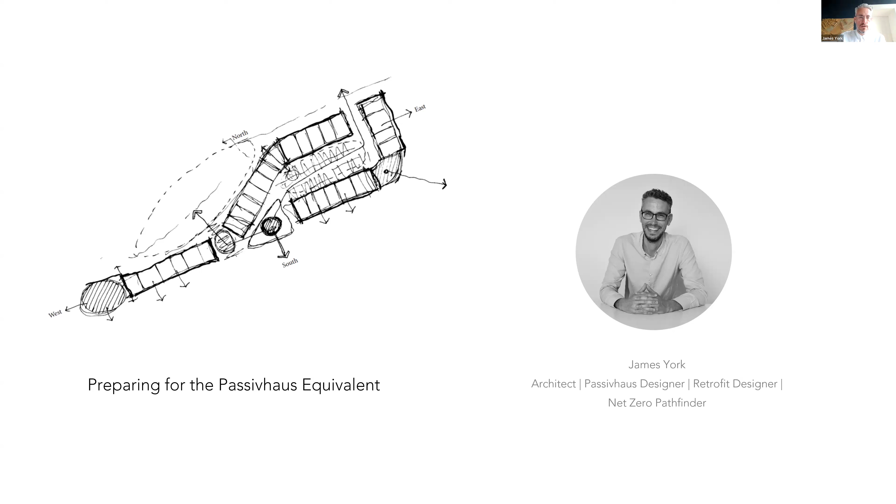Hello everybody. Really looking forward to today's discussion and presentation. I'm James York, an architect, Passivhaus designer, retrofit designer, and net zero pathfinder working at Collective Architecture. Today I'm going to be talking to you about our pathway for preparing for the Passivhaus equivalent and our thoughts on the current process and what lies ahead.

A little bit about Collective Architecture before I get stuck into this. Collective Architecture is a 100% employee-owned architecture practice with a strong track record of design and delivery of social housing, working with housing associations and social landlords across the UK to deliver homes that are socially and environmentally sustainable. Our work puts people at the heart of architecture. The practice is founded on the principles of promoting participation and sustainability in architecture. We've got 54 staff in our 3 practices in Glasgow, Edinburgh, and Dundee, delivering consultancy services across the UK.

From Portsmouth to Peterhead. In 2020, we established Collective Energy, a consultancy service that develops and promotes the implementation of low energy, sustainable and regenerative design within the practice and the wider industry. To enable this, we've been working with the Passivhaus and EnerPHit standards for over a decade, using the principles to inform our design decisions to better reduce energy demand, improve resident comfort and well-being, and mitigate fuel poverty.

So why Passivhaus? The Passivhaus Standard is first and foremost a comfort standard, putting people at the center of design. We believe that the Passivhaus approach helps to deliver homes that are safe and healthy environments to live in, comfortable and affordable to heat, and helps to promote the well-being of those who live in them, enabling them to live their best lives. We see the Passivhaus methodology as a hugely beneficial tool for new builds and retrofit properties in addressing the yawning fuel poverty gap that has worsened since these stats were recorded in 2022.

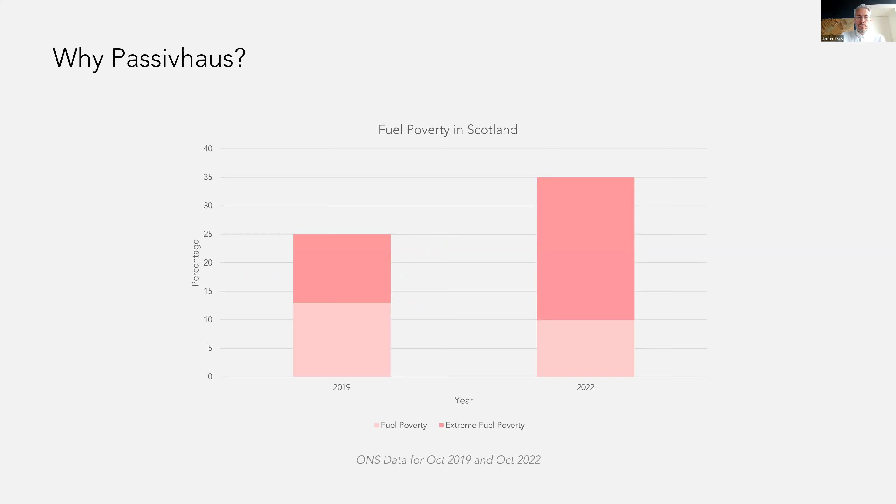The Passivhaus methodology is a proven approach to reducing the performance gap that has been shown to be between 60 and sometimes upwards of 400% in new build dwellings, and that's not even getting into retrofit. We'd never accept that gap if we were buying a new car, and I've always wondered, why does the industry tolerate it for people's homes? Designing using the Passivhaus planning package to meet clearly defined criteria helps to ensure that as-designed performance is met at completion.

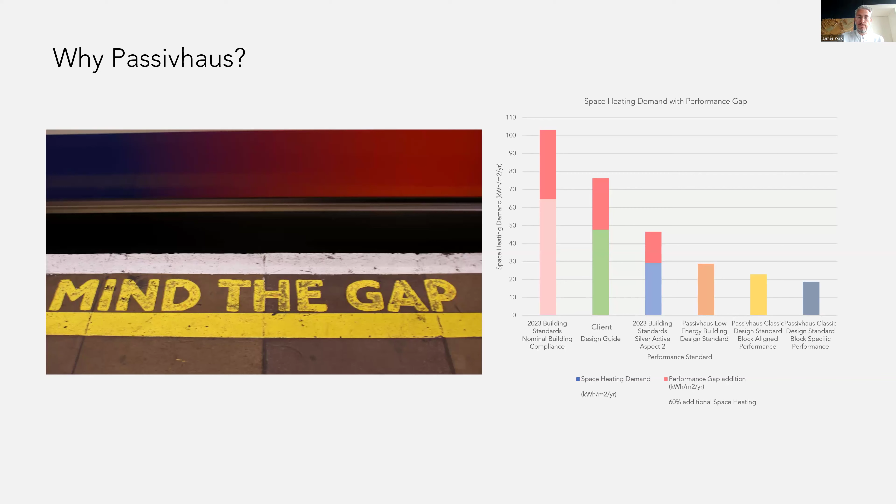SAP is a useful compliance tool. However, the focus on percentage reductions in emissions does not give as clear a picture as clearly defined metrics and targets.

This is one of the key reasons why we advocate for the use of the Passivhaus approach in delivering energy efficiency. The Passivhaus Standard sets out clear criteria for performance. These targets allow flexibility of design, provided the criteria are met.

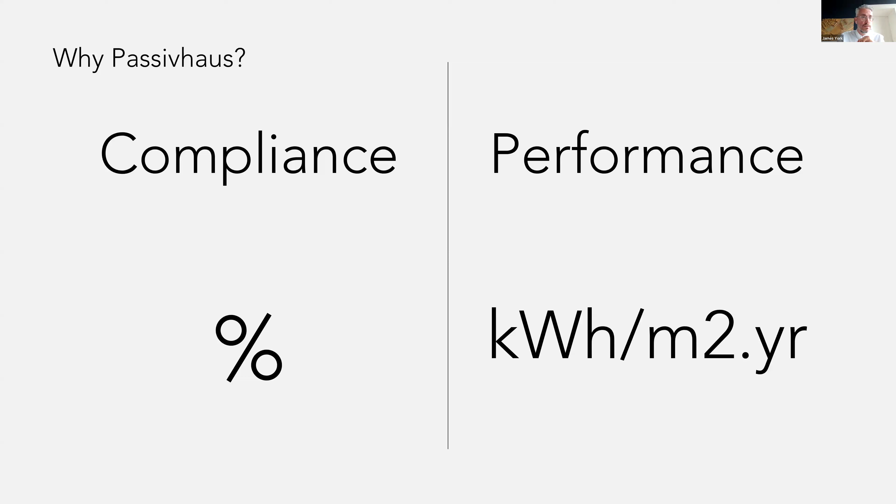The Passivhaus approach has enormous benefits to tenants, owners, and building managers, from reduced energy demand, carbon emissions, and running costs, to prolonged life cycle of components and services, to improved indoor environmental quality and healthier living and working environments.

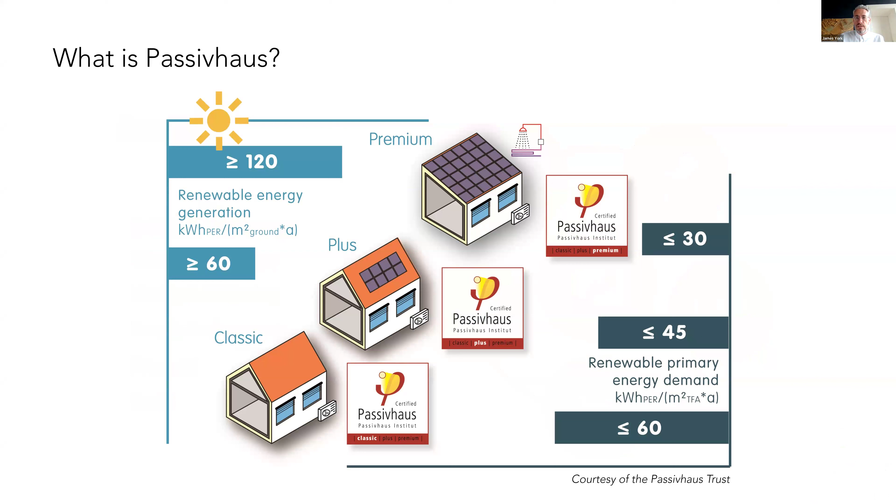What defines a Passivhaus project, and what might we seek to adopt for a Passivhaus equivalent? The Passivhaus Standard sets out 3 tiers of compliance: Classic, Plus, and Premium, with escalating levels of on-site generation. The Passivhaus Low Energy Building Standard sits beneath these for buildings that find it harder to achieve compliance.

Setting clear performance targets serves to significantly reduce energy demand whilst optimizing comfort and mitigating fuel poverty, while driving down emissions to meet our carbon budget.

Passivhaus is an oven-ready standard that has a 30-year track record of meeting targets in the delivery of affordable homes. This makes it an ideal standard to layer into the Scottish equivalent.

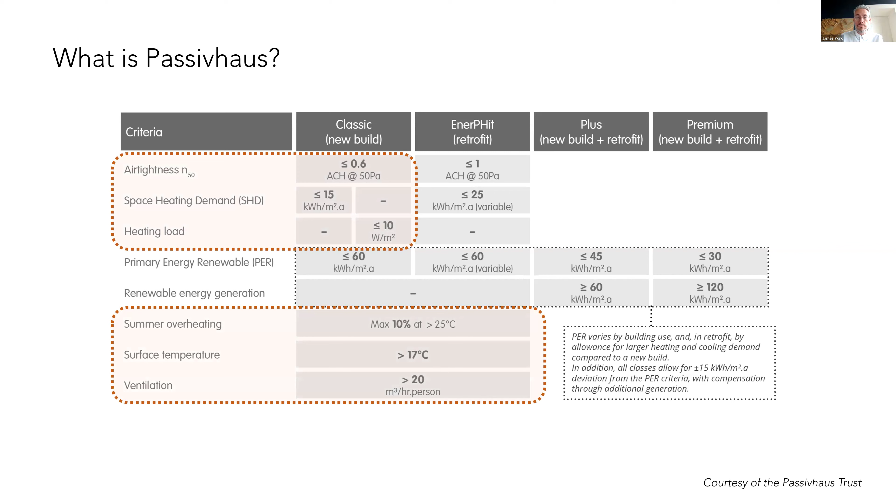So what is Passivhaus in terms of the building? It sets clear targets achieved through a fabric-first approach to reduce energy demand and meet comfort needs, which is absolutely essential. Focusing on these 5 core systems: fabric insulation, triple glazed windows, thermal bridge mitigation, building airtight, and ventilating right with MVHR.

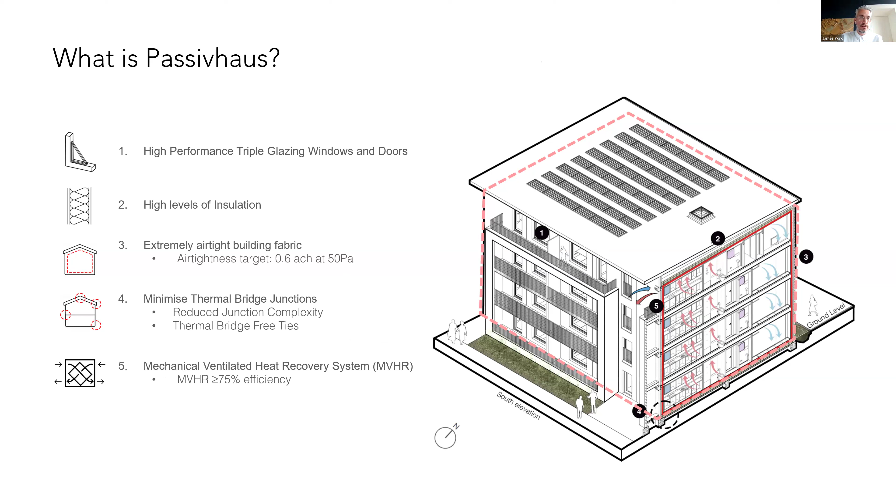The Passivhaus approach is aligned with the RIBA Plan of Work and the key gateways for statutory approval and completion of statutory approval and completion compliance of projects.

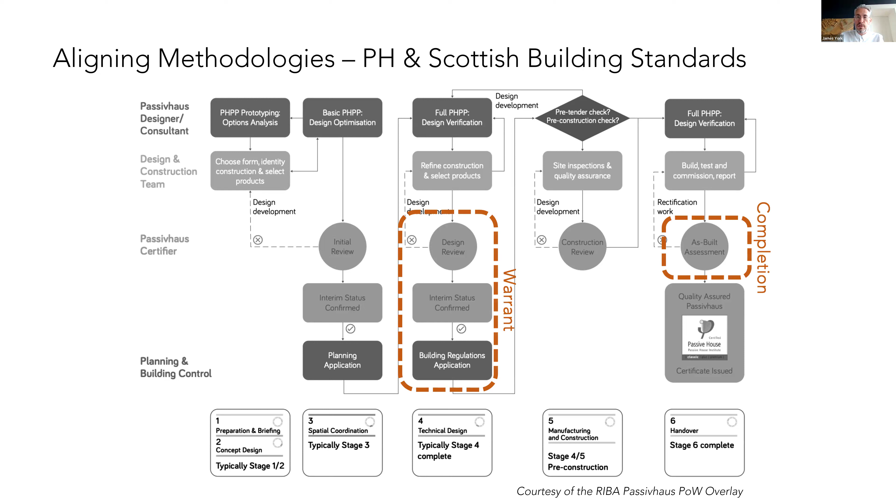What will need to take place is a shift in approach and resourcing of building standard services to review the progress of projects and provide statutory oversight of the strict quality standards necessary for the successful delivery of low energy buildings. The Scottish Government has set out a pathway for delivering legislation up to the end of this year.

They've also recognised that there's a transition period required based on the level of ambition of the legislation itself. At the moment, we're waiting for the summer consultation to happen, and look forward to the process and feeding into that.

So what could a Scottish equivalent to Passivhaus look like? Our view aligns broadly with the Passivhaus Trust view that ultimately the Scottish Passivhaus equivalent should ideally adopt the key criteria for Passivhaus, and that the QA process is mandated.

Projects would be verified by Scottish Building Standards through the existing LABSS or Section 6 assessors. The Passivhaus planning package would be approved as a methodology alongside SAP with the conversion plugin.

What would a Scottish equivalent to Passivhaus look like in terms of the transition period? This would basically mean that industry adoption and upskilling is absolutely critical, and time is needed for that.

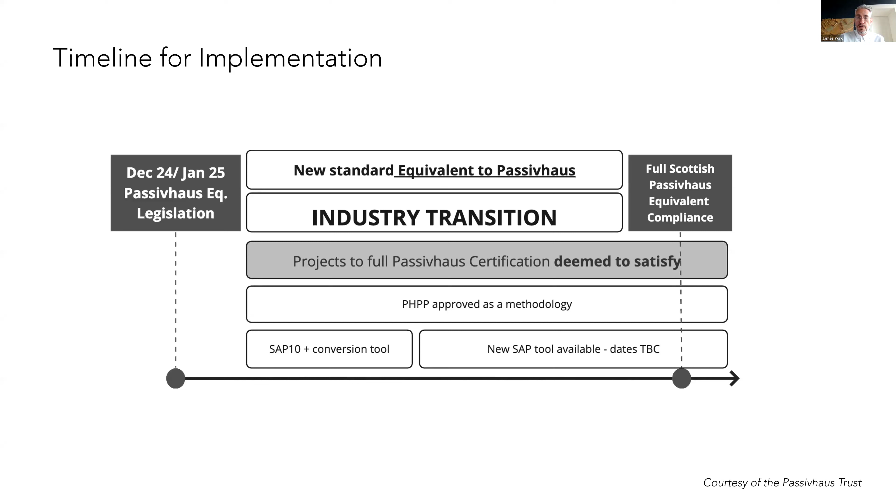So again, in this transition period, the Passivhaus Trust have set up a notional process for how the Scottish equivalent of Passivhaus might become embedded in the industry following legislation being passed in December 2024. The definition of a clear pathway backed up by robust legislation will be critical to provide certainty on the direction of travel so that all parties in the industry can transition with confidence.

Collectively, we're working on a number of projects to the Passivhaus Standard, including the Enerphit Standard, Woodside Towers, 310 flats retrofitted to the Enerphit Standard. We'll talk a little bit about that later. We're currently on site with Polton Street, which is an extra care and intermediate care development, and it will be the UK's first Passivhaus intermediate care building.

And then Powder Hall Nursery and integrated living housing development, which is a Passivhaus Classic project, and we're also Passivhaus consultants on Somerstown regeneration down in Portsmouth, which is a 565 dwelling mixed tenure community and commercial project to the Passivhaus Classic standard.

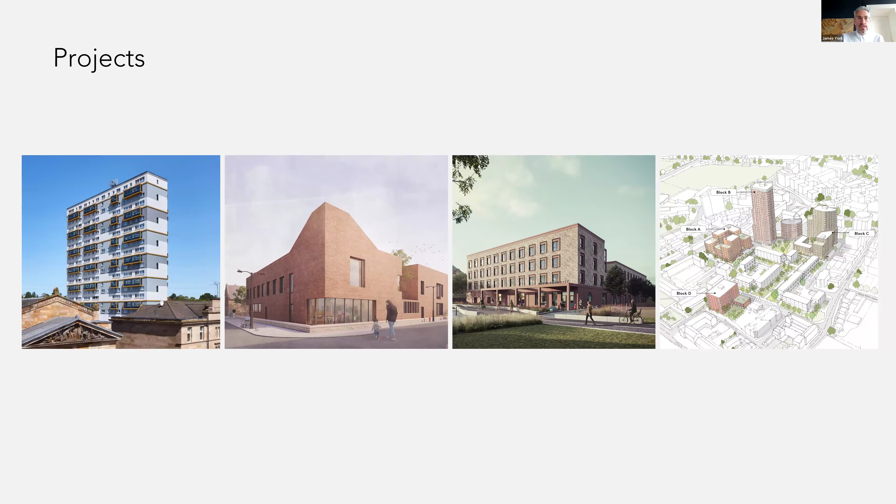Today I wanted to talk about Dundashill, which is a Passivhaus residential project delivered for West of Scotland Housing Association, 90 units of new build social housing, recently handed over in April of this year. The contract value for this project is in the region of 21 million.

One of the key successes of this project was the early definition of the brief at RIBA Stage 2. One of the key elements of that brief was that the buildings would be fossil fuel free, and that the energy cost to heat and provide hot water within the building would be as low as gas. We early on advised the client that in order to do this, delivering the project to the certified Passivhaus Classic standard would be advisable, and they adopted it.

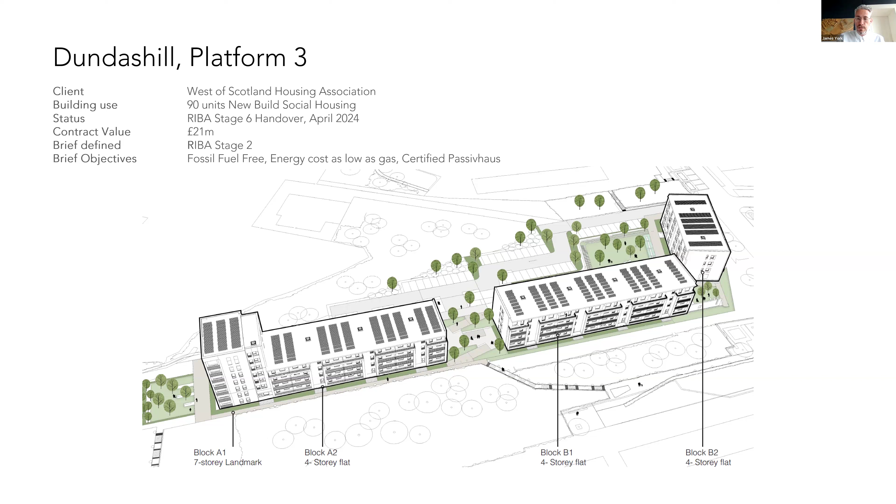In our view, form follows simplicity. With this project, we were able to demonstrate that with great efficacy. Orientation of the project was a really early win. We were able to get most of the properties facing south. A few of the properties are facing east-west, but the bulk of orientation of the properties, which are through flats, are north-south.

We've got, I do apologize for this folks, my PowerPoint is really playing up here, but I shall persevere.

Form factors: simple, robust form with few indents and freestanding balconies. This makes the fabric simple and easy to design, detail, and insulate. Modular construction with panelized offsite manufacturing has helped to speed up and make the delivery cost effective. We've also integrated circularity principles, using the shearing layers principle adopted to facilitate ease of assembly, disassembly, and adaptation.

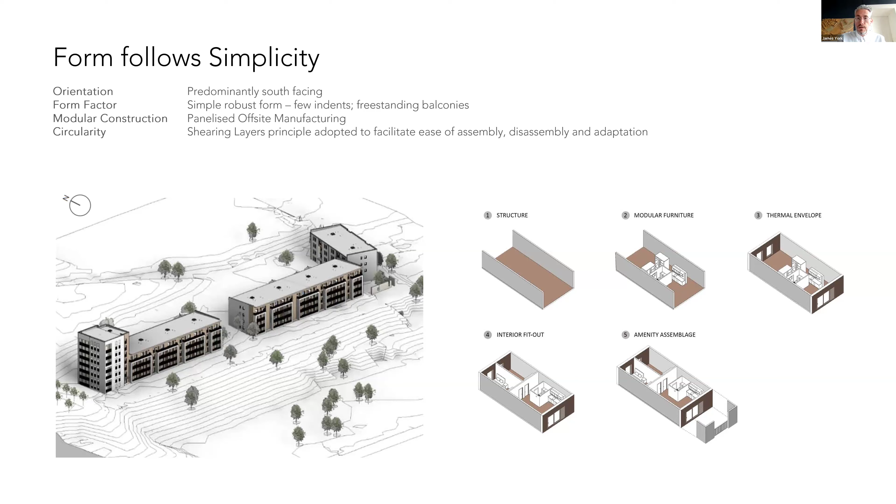We've taken a fabric-first approach with this project, which is broadly aligned with what we'd be looking to deliver in terms of building standards at the moment. Glazing is obviously a bit more enhanced, in that we've used triple glazing with a U value of 0.8, but the performance of the walls, floor, and roof are not a million miles off of what you'd be doing with current building standards.

Air tightness is obviously a far more onerous target, but through the simplicity of the design and careful detailing, we've been able to reduce junction complexity and thermal bridging using thermal bridge-free ties, reducing the impact of thermal bridging on the fabric, allowing us to optimize the fabric and not have unnecessary embodied energy within the overall fabric buildups. Our MVHR system has been designed to be as optimal as possible, reducing duct length runs and achieving an efficiency of 80%.

We've been able to achieve the 15 kilowatt-hour per meter squared space heating demand, but we're meeting compliance with the 10 watts per meter squared heat loads compliance. Alongside the air tightness targets, we've been able to retain the fossil fuel free heating strategy ahead of this being implemented in the current standards in April of this year.

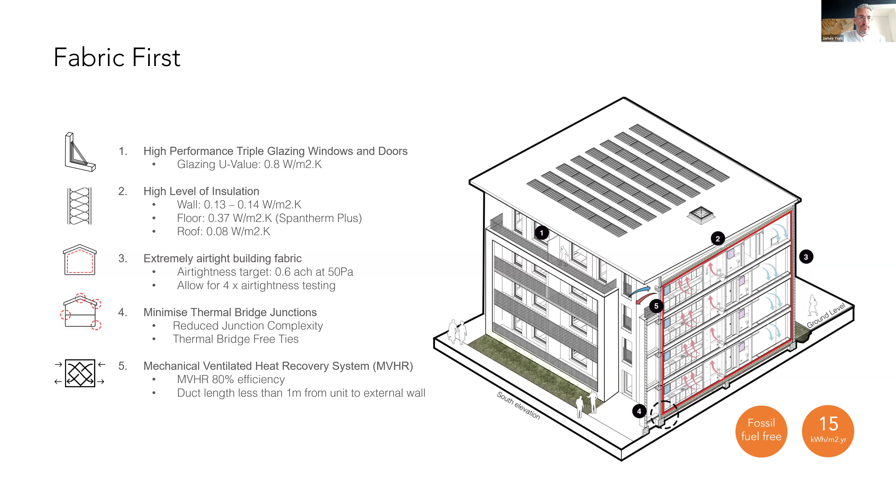Quality management has been absolutely critical through the process. We've been working very closely with the contractor to enable them to get their head around how the buildings can be built to meet the requisite standards, deal with complexities in the design, and ultimately map out a way through the evidencing and quality management process.

Air tightness and thermal continuity drives a lot of the quality standards. This is a good thing. Whilst initially there's a steep learning curve, the delivery becomes more streamlined through careful quality management, supply chain engagement, sequencing, mock-ups, inspections, evidencing and sign-offs, air testing, which we had 4 tests throughout the project, and then ultimately commissioning.

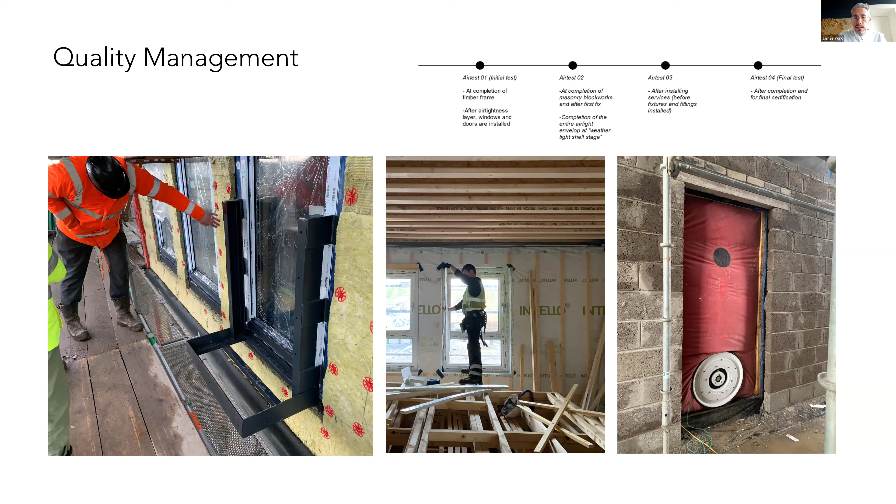Good workmanship is achieved through onboarding and upskilling of trades, through QA management, and a collaborative attitude. Talking about challenges leads to solutions being arrived at collectively. These measures help facilitate smoother running of projects, which benefits contractor, client, and all engaged in the process.

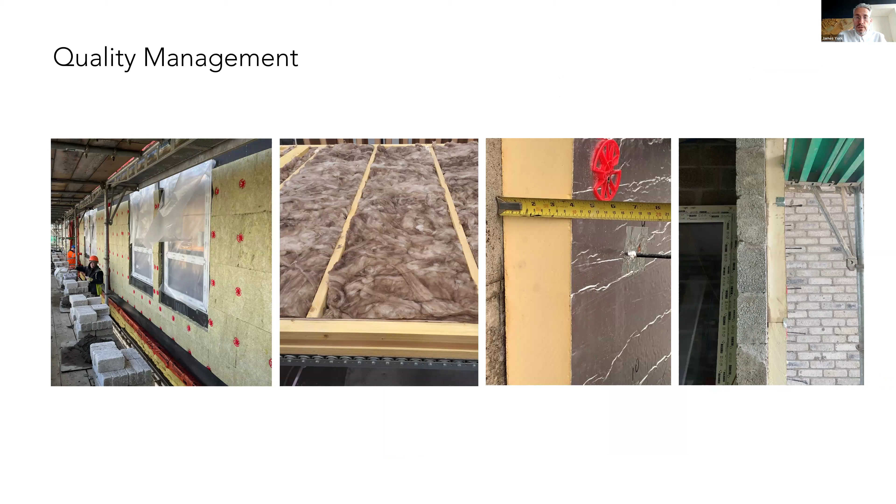In terms of lessons learned from this project, the early commitment made by the client in terms of setting project targets has been crucial to the project being delivered to the Passivhaus Classic standard successfully. Embracing simplicity by simplifying the design and embracing repetition, we could minimize complexities, reduce errors, and enhance overall efficiency without compromising architectural quality.

Early engagement and collaboration. Collaboration in our books is absolutely critical with Passivhaus projects. Collaboration should start in the design phase with input on cost, buildability, and materials. Having the contractor and specialists on board at early design stages is hugely beneficial.

Site induction and toolbox talks encourage adoption of the Passivhaus ethos with all operatives on site, to motivate them to take pride in their craft. Quality assurance systems, a robust design management, change control, and quality assurance system are vital to meet demanding airtightness and insulation standards.

How will this Scottish Passivhaus equivalent impact housing associations?

In terms of project planning, we see clear brief definition at early project stages with appropriate performance targets as being critical. The Passivhaus certification is an easy way of setting a clear set of project brief requirements. As this legislation moves towards a Passivhaus equivalent, that will become more straightforward again.

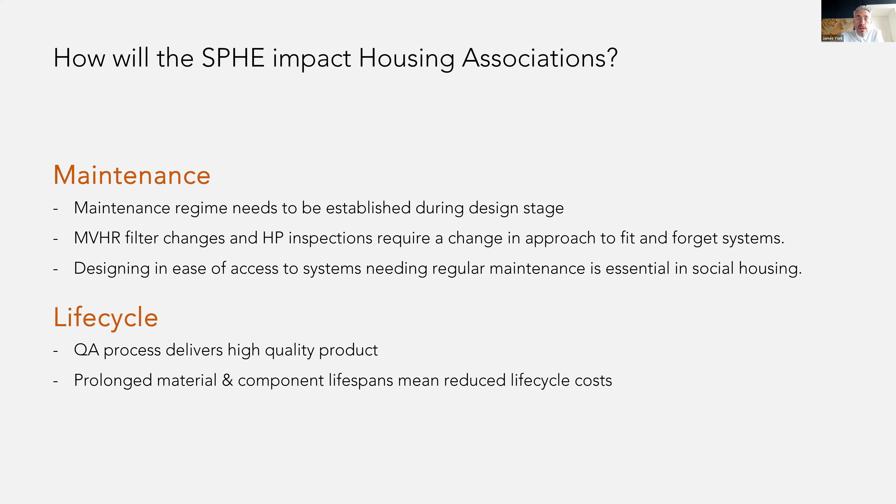In terms of life cycle and life cycle costs, the QA process delivers high quality products, which also serves to prolong the material and component lifespans, meaning reduced life cycle costs through the building's life.

We see that there are some necessary changes within the industry. This is a very short list, but it could be expanded ad nauseum.

In terms of legislation, a clear pathway for change backed up by legislation to enable the industry to shift with confidence. Better access to funding to enable this change for people like yourselves who are going to be delivering these homes is absolutely critical.

Upskilling of the industry, from clients to designers to constructors, is going to be a hugely important forward shift. So building knowledge and skill to support this change in how we design and build tomorrow's homes.

So lastly, we see the passive house equivalent as a key way of enabling change in how we build homes in Scotland. We believe that in spite of the challenges for implementation, the Scottish equivalent will be hugely beneficial to all parties engaged in delivering new homes, setting clear targets and standards, defining quality at all project work stages, promoting longevity of new and existing housing assets, and mitigating fuel poverty and improving livelihoods, as well as setting homes on a net zero carbon trajectory.

Delivery of passive house is doable, especially at scale. The industry is already transitioning towards passive house in line with changing building standards, and with clear legislation and the right support across all sectors of the industry, this important shift can happen, in our view.

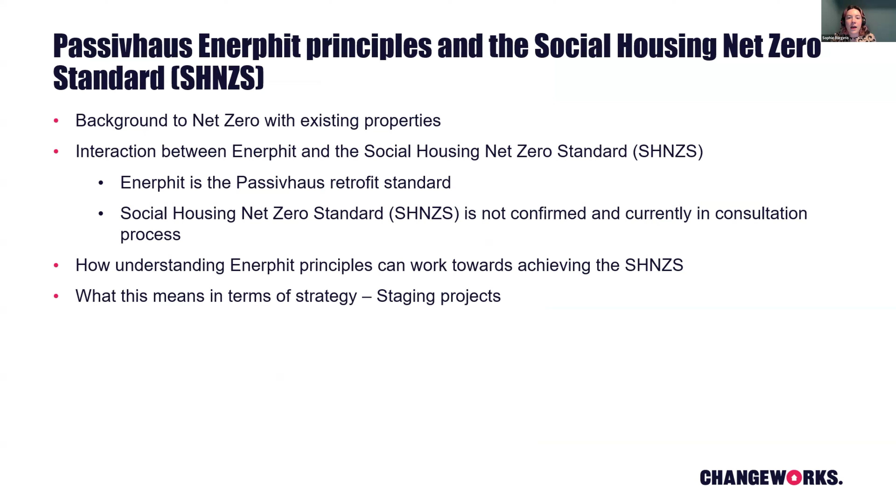This is just a bit of an overview of what I'll talk about in the next 10 or 15 minutes. I'll cover the background to net zero with retrofit and existing properties, talk a bit about the interaction between EnerPHit and the social housing net zero standard - or SHNZS, with all these acronyms - and then start to think about how understanding the principles of EnerPHit can work towards achieving the net zero standard, and what this means in terms of strategy.

This requires whole house retrofit at scale - treating the whole of the property rather than thinking about individual measures. Also, to achieve this, robust quality assurance is needed, which ensures that projects achieve these predicted or modelled results, and that it's not just kept in the model, that savings are actually quantified in real life. Also note that greater reductions in energy consumption to achieve net zero are needed than current standards.

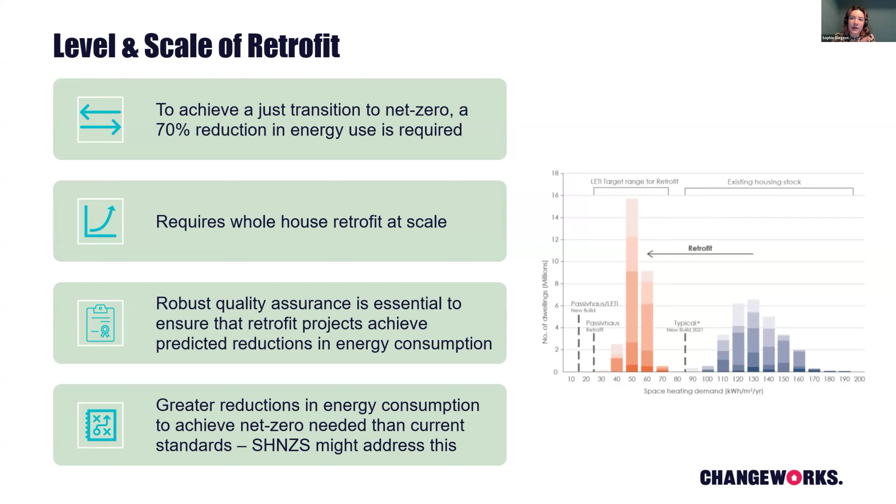However, depending on the social housing net zero standard, this may address this current discrepancy. So the social housing net zero standard is the proposed replacement for EESSH2. It's going to be introduced in 2025 at the earliest. Right now the consultation document is out, and I believe the deadline for consultations has passed, and they're going to look at all of those.

Responses, including, I think, Changeworks. I know that SFHA has also put forward a response. But essentially the document supports a fabric-first approach, and it also aligns with fuel poverty targets that the Scottish Government has set.

So its main areas of focus are heat demand reduction, so reducing the amount of energy used to heat the property, and they refer to this with the fabric efficiency rating, which is measured in kilowatt hours per meter squared per year - basically the amount of energy spent per area of the property over the course of the year.

Another focus is the replacement of polluting heating systems. Also, they mention ventilation, which I think sometimes gets forgotten, but it's ensuring good air quality, making sure that when air tightness is increased, there's a ventilation strategy so that the health of people in the building is maintained.

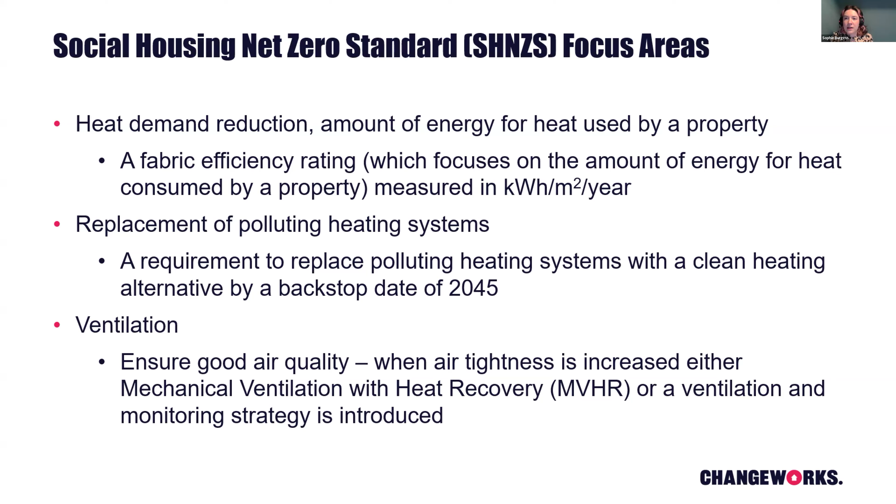As an EnerPHit overview, so it's the Passivhaus retrofit standards, and it aligns very closely with the Passivhaus new build standards, but it's adjusted to reflect the limitations with retrofit. Essentially you can't always achieve the same high standards when you have an existing building.

There's two different methods. One is based on insulating components like the walls or roof to a certain level. Another one is based on just the heating demand figure for the property. But with all of them, air tightness testing is required, mechanical ventilation with heat recovery, and also limited energy use.

And as with the Passivhaus equivalent, it's thinking about comfort and health in mind.

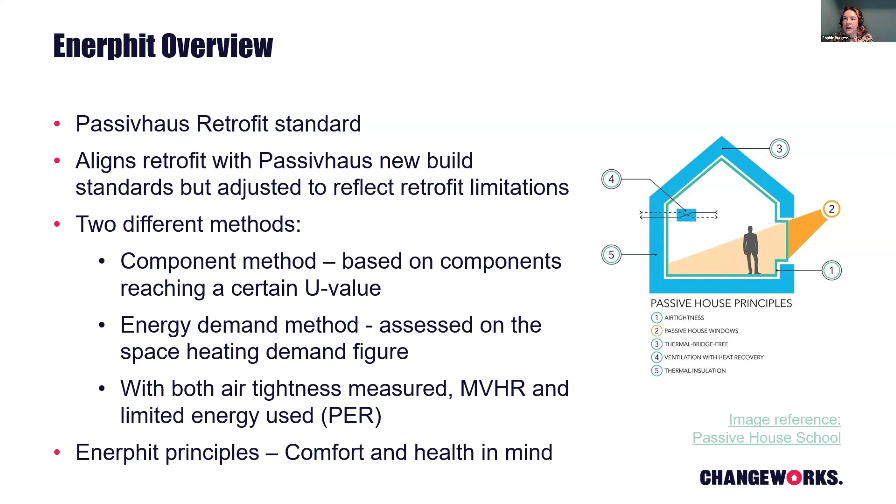So almost thinking about these principles can help achieve the legislation, and having an understanding of them, even if you're not after certification of EnerPHit. Sometimes using the EnerPHit standard can really help with a deeper understanding of what the property is actually wanting to do.

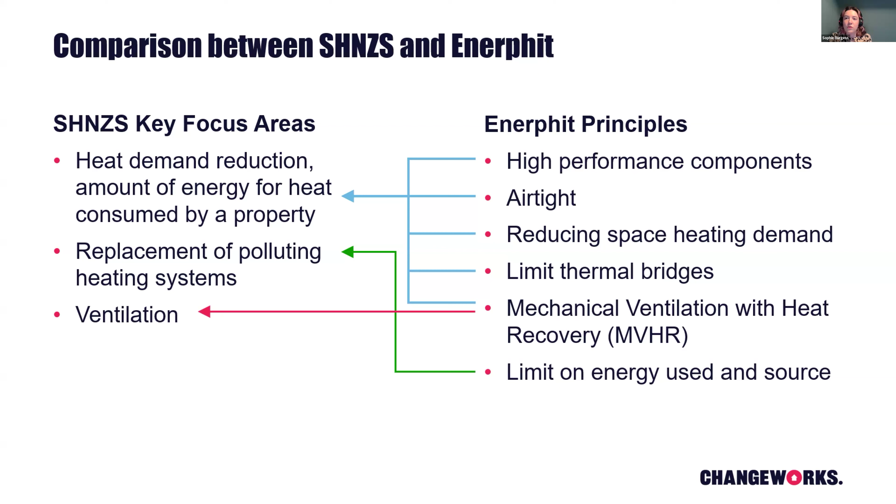Just to note also, there are some areas of net zero that aren't necessarily within the net zero standard, or there are some aspects to think about that are beyond the kind of criteria. Obviously, longevity is something to think about - that Enerphit and Passivhaus, they put emphasis on the longevity of components and thinking about life cycle costs.

So making sure that when you place components within them, that you're not replacing them constantly, but having materials that are able to hold up and have a long lifespan. Also thinking about maintenance, so thinking about maintenance as almost an energy efficient measure.

As James had mentioned, building in maintenance to different services to essentially ensure that you get the most out of them and increase the lifespan of these components. That helps with the net zero aspect in terms of you're not having to buy new pieces of equipment, but also helps in terms of costs overall. So regularly having maintenance means you don't have to replace a system wholesale.

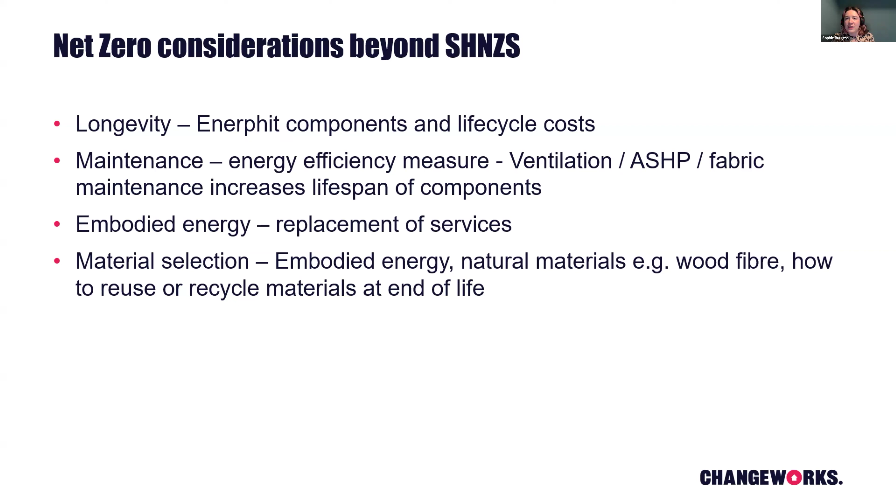Also thinking about embodied energy. As mentioned, the replacement of services, but also this is about material selection - so natural materials may have less energy put into them when they're made. And it's also thinking about if you can reuse or recycle materials at the end of life. So these are just some net zero things to keep in mind, even if they're not necessarily within the legislation.

So in terms of how to integrate Enerphit principles into strategy for housing associations, so to achieve these high levels of energy efficiency and also continue with projects and maintenance before the net zero standard is actually confirmed, one approach that can be useful is a phased project approach. I'll run through a project example of stage installations.

Also, just to mention that PAS 2035 is one approach to ensure a joined up approach to staging projects. So essentially it's taking the planned overall project and then breaking it up, so you're not installing all the measures at once.

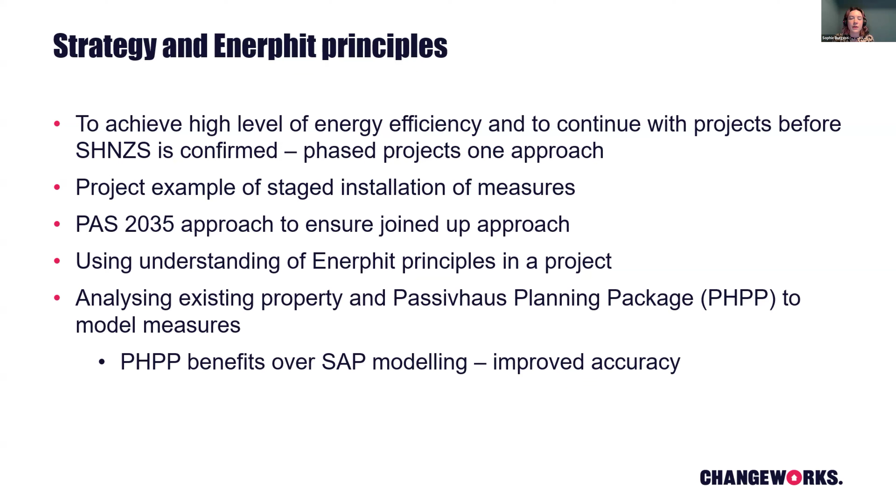And then also one other way to integrate the Enerphit principles into strategy is looking at existing properties and analysing them with the Passivhaus planning package. So this models measures in a different way to SAP, and some researchers suggest it has more accuracy to real life.

I'll talk through one project we've been working on with the Glen Housing Association. The project aims were to deliver high-level net zero strategy development, look at best practice approaches, and think about affordable bills to tenants.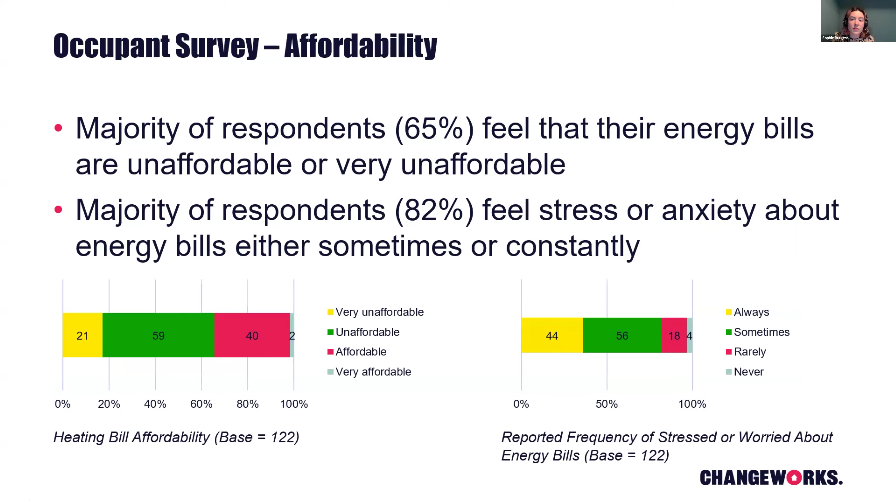We also did an occupant survey on this project, which was interesting for thinking about comfort and health. The results showed that the majority of respondents felt their energy bills were unaffordable or very unaffordable, and most had stress or anxiety about this. There were also health impacts associated with homes being too cold or damp.

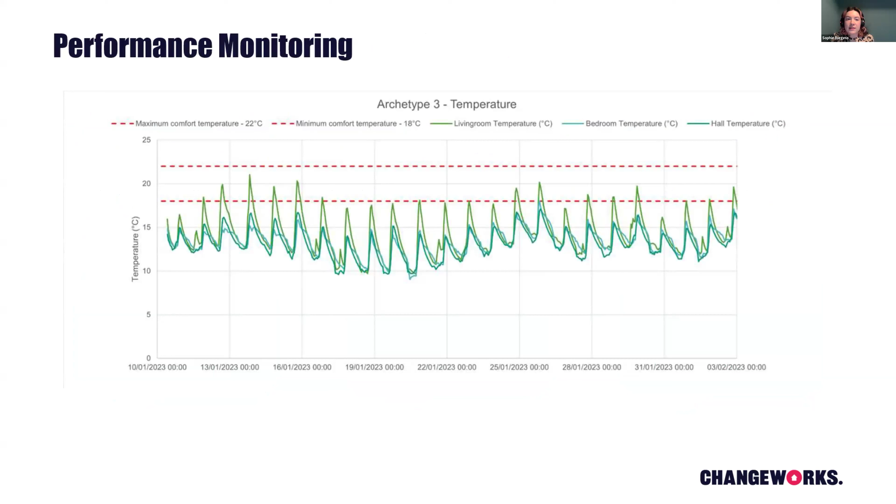We found the survey quite good to put into context the work we were doing. We also looked at performance monitoring, which showed that lots of these properties were very cold, damp, and had issues - showing humidity outside the normal range. We also used thermography to look at cold bridges and cold junctions in the properties.

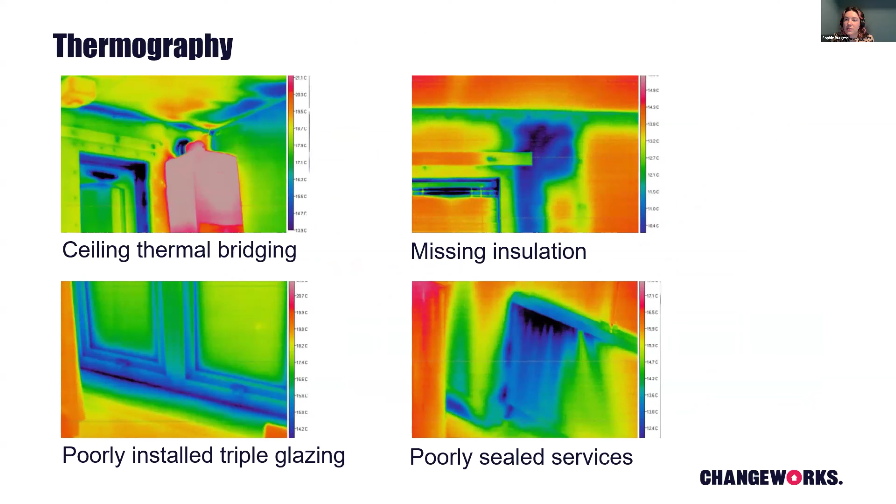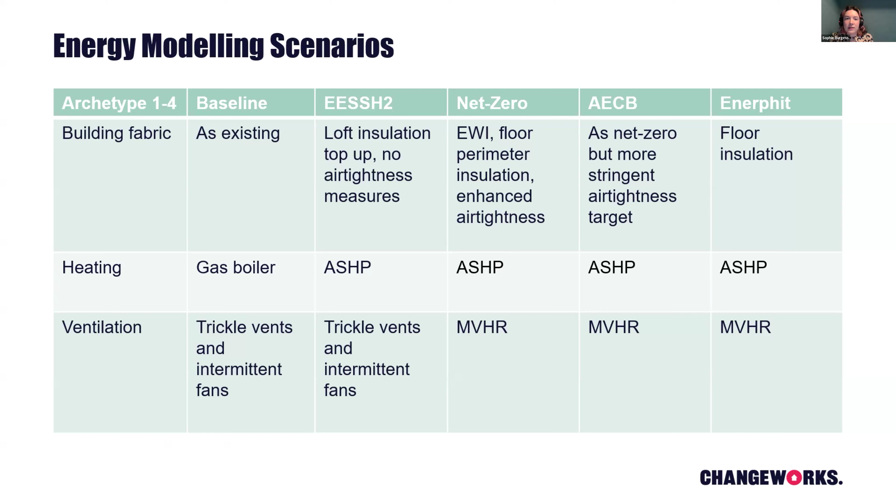We proposed a range of scenarios, all modelled using PHPP, which came out with a range of results in terms of what energy was needed to heat these homes, and also the fuel bills for tenants.

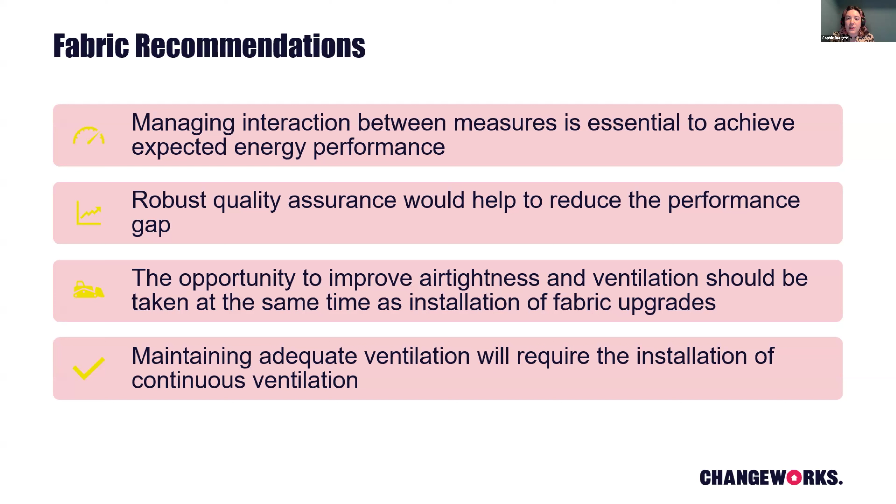From this we had several fabric recommendations, some of which I've touched on already - thinking about the interaction between measures. We wanted to ensure quality assurance going forward, improved air tightness, and thinking about ventilation at the same time as these fabric upgrade measures. In terms of ventilation, we wanted to look at continuous ventilation.

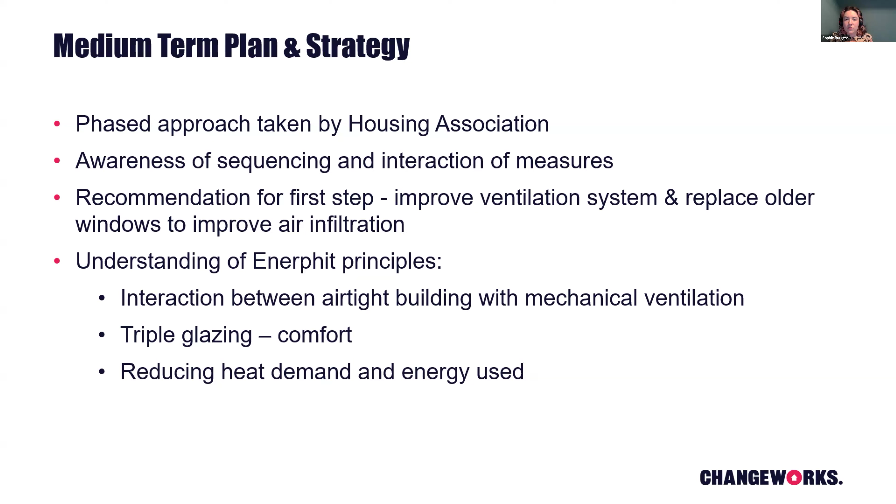It was introducing triple glazing, which helps with comfort and reduces condensation on the windows, which can also help with the longevity of the windows. One of the main aims was reducing that heat demand and energy used.

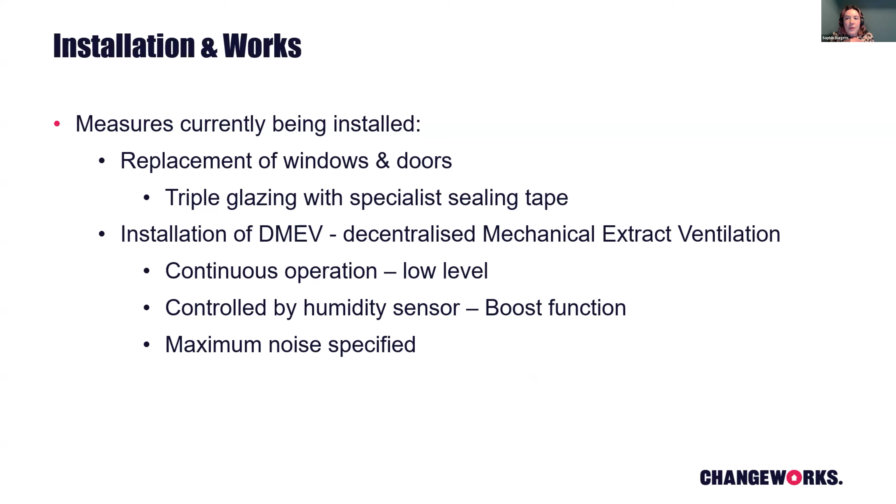A project is on site right now. Some of the measures currently being installed are the replacement of windows and doors with triple glazing and specialist sealing tape, and the installation of decentralized mechanical extract ventilation. It's continuous at a low level, then can ramp up when it detects high humidity, with a maximum noise specified - again thinking about comfort.

I'll hand over to James to talk about one of the Collective Energies projects as well.

James, I think you might just be on mute there. We all do it. Shall I just quickly screen share once more? Yeah, sorry, beg your pardon. I'm having a little technical issue here. Sophie, would you mind screen sharing? Sorry, something odd has just happened. Very out of practice with using Zoom, and I've shrunk everybody down, and I can't seem to get the thing back working. So is that okay Sophie? Do you mind? I'm not sure if I have the slides right, me.

Okay, apologies. Let me work this out. There we go. I've done it again, folks.

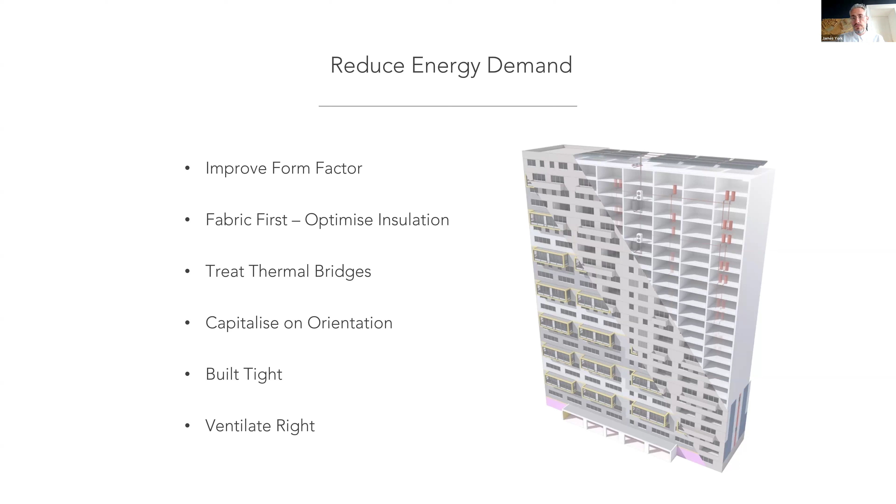The pre-retrofit space heating demand was 120 kilowatt hours per meter squared per year, and the Passivhaus standard is to get that down to 25, which is what we were targeting.

The form factor of the building, as I said, was already pretty good, almost, I dare say, very good. But there were a lot of inset balconies, and a lot of projecting balconies, which were presenting a huge amount of thermal bridging.

So one of the early strategies that we developed was to make the inset balconies internal sun rooms, basically, and to maintain the continuity of the thermal envelope down the outer face of the building.

We also turned the projecting balconies into oriels or winter gardens. Those were cold structures, but through careful thermal bridge design, we were able to get those to work and effectively maintain a much more efficient thermal line for the building.

So that contributed to a 20% reduction in the form factor, and this is what I was talking about earlier in my presentation: these critical design moves at early stages in the project can save huge amounts of energy.

That 20% we'd have had to make up for with additional insulation, higher spec, more embodied energy going into that. So through careful rationalization of the design, you can make some really powerful and significant energy efficiency and carbon efficiency moves with these projects.

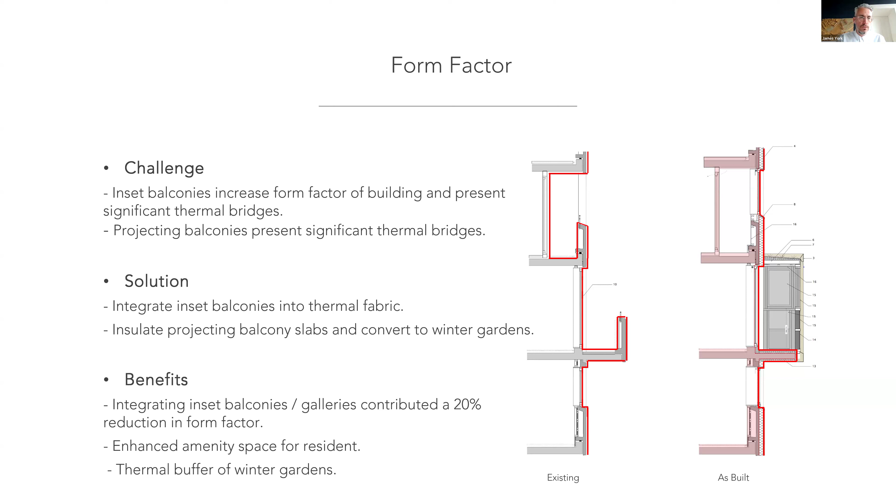So one of the other huge challenges with this project was all the residents were going to stay in place during the retrofit. There was some minor decant through the project, but luckily we were able to apply external wall insulation with these tower blocks. We're not able to do it on all tower blocks.

We're currently working on a set of category A listed tower blocks here in Leith in Edinburgh. But with these, we were able to take an EWI approach. That meant that all works were undertaken with tenants staying in their homes.

Decants were arranged for more disruptive works, specifically around changes to the heating and ventilation systems. But the sequencing of activities, working with the residents through carefully considered tenant liaison—both the contractor and the client team especially had dedicated tenant liaison officers for the duration of this project. That was a key strand to the success of this project.

So certainly Passivhaus standard retrofit is deliverable, particularly at scale. We were able to work with our client—we didn't go down the full certification process, that got kiboshed at tender stage, but we continued to work with the client and the contractor to retain those core principles of the Passivhaus process through the delivery of the project, which meant things like mechanical ventilation with heat recovery were retained.

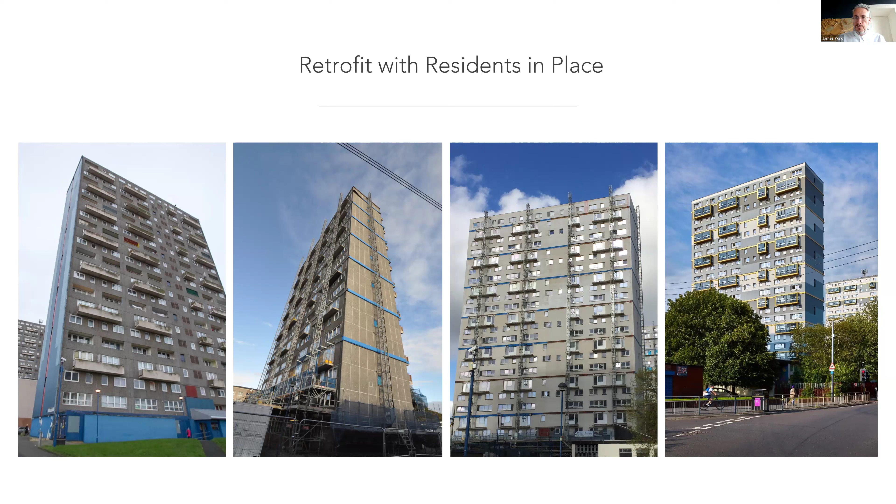Air tightness, which we were able to test on a few properties, was down at 1. The thermal bridge free design element of the retrofit was delivered on. So that's just a very, very rapid fire snapshot.